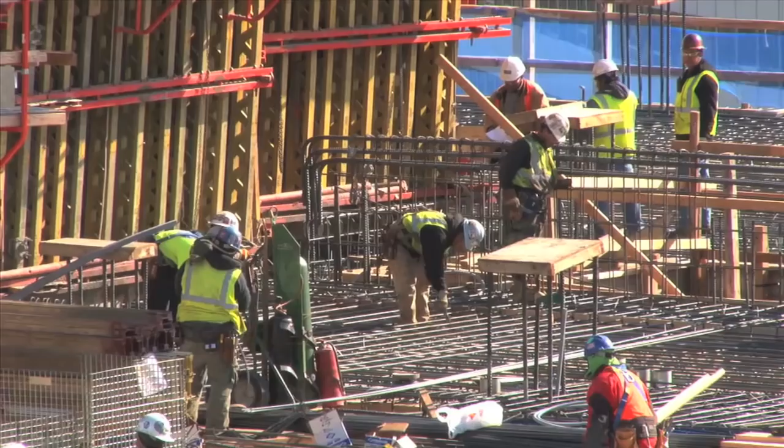There are enormous challenges facing our planet today, and the built environment, as one of the main consumers of energy and resources, offers us a plausible framework to address these issues. Green building gives us a viable way forward in constructing healthy indoor and outdoor spaces, reducing our collective ecological footprint, and in taking our next great leap as a society in the necessary transition to a sustainable built environment.

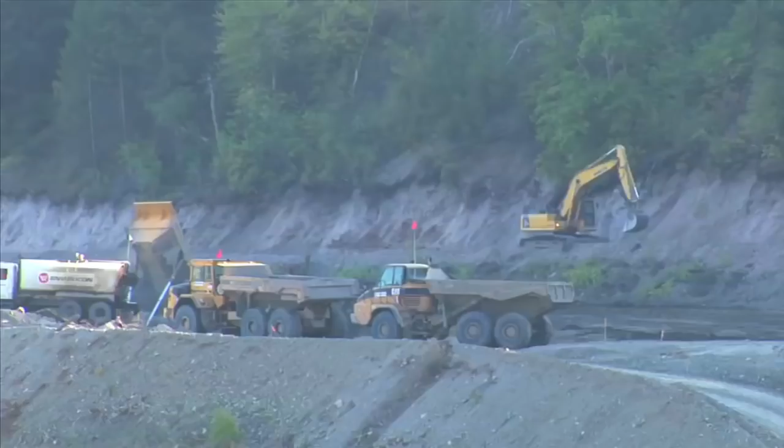Buildings consume significant resources during their design and construction, both in terms of capital and in the raw materials that go into their construction. The clearing of land for development, which in many cases involves forest clear cuts and bulldozers, throws the delicate ecosystem right out of balance.

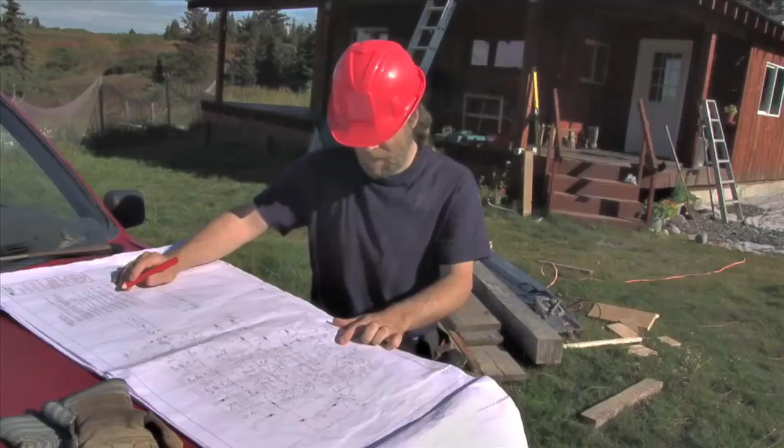This doesn't even mention the extraction, manufacturing, and transportation of these same building materials, which pollutes the air, the land, and the water. Looking at the bottom line, sustainable design and construction, often called green building, is a fundamental necessity in order to help us blunt the worst effects from climate disruption.

Green building reduces environmental damage and pushes project teams to reach ever higher in pursuit of regenerative buildings, which inherently do more good than harm to the natural environment.

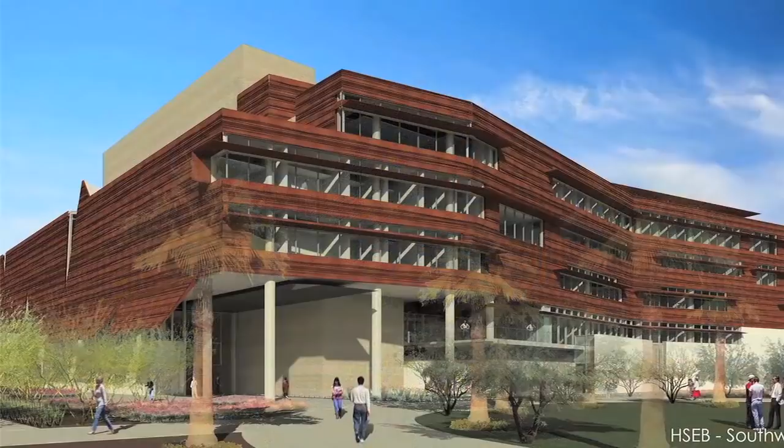The U.S. Green Building Council was formed in 1993 to promote and encourage green building. The mission of USGBC is to transform the way buildings and communities are designed, built, and operated, enabling an environmentally and socially responsible, healthy, and prosperous environment that improves the quality of life.

USGBC develops the LEED Green Building Rating System as a primary tool in service of achieving this mission. LEED stands for Leadership in Energy and Environmental Design and recognizes best-in-class design and construction practices.

This comprehensive free online course will provide you with everything you need to know to pass the LEED Green Associate exam, which demonstrates an understanding of these environmental imperatives and a basic understanding of the LEED Green Building Rating Systems.

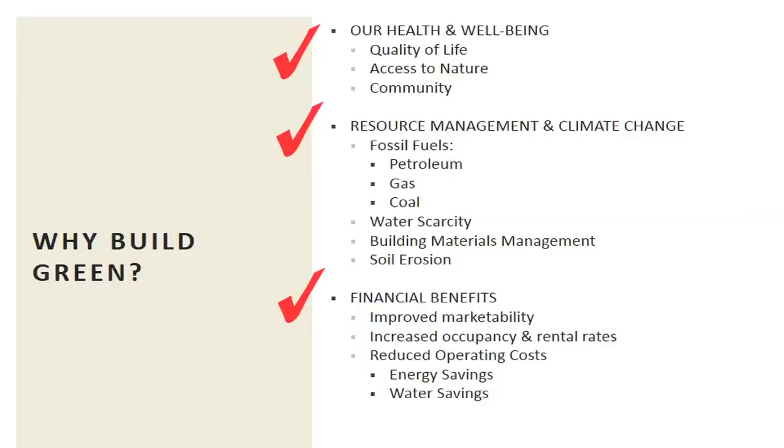Following the idea of the triple bottom line, we consider how each of the 3 aspects relates to the built environment. Our health relates to people. Resource management is the planet or the environment. And finally, the financial benefits, should be readily apparent, relates to the economics and profit, which definitely deserves a place in this triple bottom line.

With LEED fundamentally an instrument of market transformation, it's important for LEED to engage building project teams by tying these program requirements, which are collectively known as credits, prerequisites, and minimum program requirements, more on that in a bit, to specific goals that the LEED program is trying to attain.

What we see here are LEED's system goals, also known as their impact categories. These 7 impact categories were developed and approved by the LEED Steering Committee for use in LEED version 4, and they're as follows: reverse contribution to global climate change, enhance individual human health and well-being, protect and restore water resources, protect, enhance, and restore biodiversity and ecosystem services, promote sustainable and regenerative material resource cycles, enhance social equity, environmental justice, and community quality of life, and finally, build a greener economy.

Now let's talk about the 3 concepts that are at the very heart of this course: USGBC, GBCI, and the LEED Green Building Rating System.

USGBC is the United States Green Building Council. The vision of USGBC is that buildings and communities will regenerate and sustain the health and vitality of all life within a generation. This represents the long-term view of USGBC.

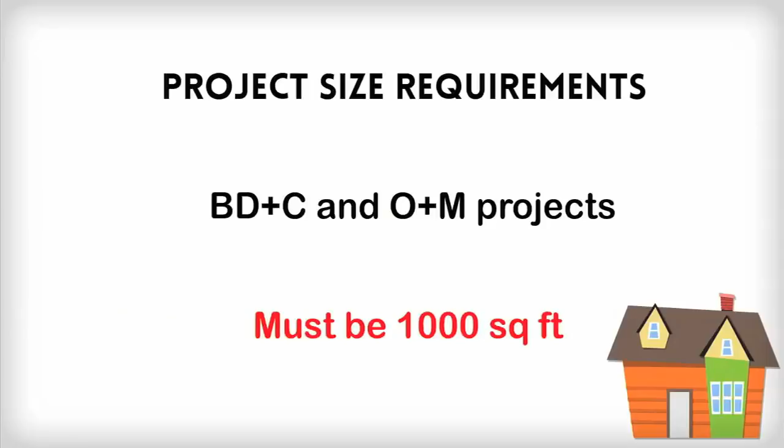Now, the thresholds and calculations that make up the system of evaluation in LEED really start to break down and lose a lot of their meaning once the building or space being evaluated reaches relatively minuscule proportions. So with that in mind, the building design and construction and the operations and maintenance rating systems must be 1,000 square feet. It's not an especially high bar in terms of size.

Interior projects can be as small as 250 square feet, so they can be pretty little, but you can't have a fuel station kiosk or something like that qualify.

Now, LEED for neighborhood development projects need at least 2 habitable buildings, and they have a maximum size of 1,500 acres. And then finally, LEED for homes projects must meet the definition for a dwelling unit, which includes permanent provisions for living, sleeping, eating, cooking, and sanitation.

What this means is that a dorm room with a shared restroom could not be a LEED for homes project. However, the building as a whole could be eligible. To contrast that, your typical apartment that does have all of those provisions that make it a dwelling unit, so sleeping, eating, cooking, sanitation, and living quarters, would qualify for that minimum program requirement.

So let's take a closer look at number 2 here when we talk about LEED boundaries. The LEED boundary needs to include the project area as well as parking if applicable. So while this means there can be more than one acceptable boundary for a project, these are declared by the project team and either accepted or rejected at face value by the LEED reviewer.

So the project team has a degree of discretion. The one commonality that all LEED project boundaries absolutely need to abide by is that they have to be consistent across all credits. And ultimately, the LEED reviewer has to accept the project team's designation of that boundary.

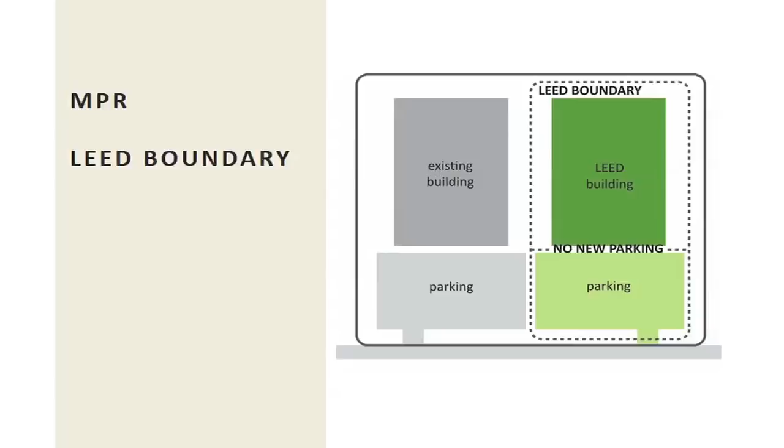Now, some projects, they may be multiple concurrent LEED applications or located on a campus with some shared resources, can comply with LEED using the campus guidance document provided by USGBC. Let's take a look at what that means. The campus approach uses the site area of the entire campus for certain eligible credits. I'll give you an example.

Rainwater management is a credit in the Sustainable Sites category of LEED, and it involves managing the rainwater that falls on the site and, generally speaking, infiltrating it on the site. It's a little more complex than that, as we'll see when we get into that category. But big picture, you need to infiltrate the majority of that rainwater on your site.

Now, there may be a case where it's most appropriate to infiltrate it on a different parcel on the same campus. What this guidance document does is clarify how LEED projects can do that within the scope of the program. So the answer to the rainwater management question is you're absolutely free to infiltrate it anywhere on a contiguous portion of the campus. It could be 100 feet away. For very large campuses, it may be a mile away. But the critical part here is that it's infiltrated on the campus master site itself.

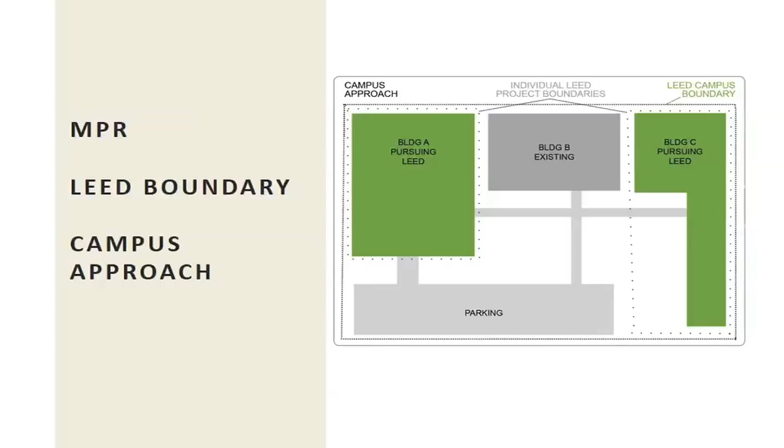Another thing that would be shared would be parking. You'll see here that the LEED project boundaries don't include the parking. However, the LEED application would need to address the parking attributed to the building, shown here in the parking lot, which would be accessible to Building A and/or Building C occupants. So the parking spaces would need to be factored in where appropriate, but the parking lot itself and the construction, say the construction waste of creating the parking lot, those types of things would not be included.

LEED uses a term called FTE that's pretty important. It comes up a lot within the rating system. FTE is short for full-time equivalent. Now let's take a look at what that means.

1 FTE equals 1 individual in a building for 8 hours a day, 5 days a week. Another way to think about it is 1 person in a building for 40 hours every week. It wouldn't have to be the number of days in a week—really, it is hours per week. So what matters here is that 1 individual could equal exactly 1 FTE.

But say a part-time employee who works 6 hours a day in that same building, 5 days a week, would not be an entire FTE. They would be a fraction of an FTE. So if it was 6 hours, then it would be 3/4 of an FTE, based on that 1 individual. It's also possible for a single individual to count as more than 1 FTE.

Why this is important is that we look at FTE in terms of defining how many uses per day certain types of building amenities will be used. In the case of water fixtures, you look at the FTE calculation to determine how many times they'll use those flush and flow fixtures during the course of a basic day. So an FTE who's there, say a part-time employee who's there 4 hours a day, would be expected to use those same facilities only half as frequently as an otherwise similar individual who's in the building for 8 hours a day.

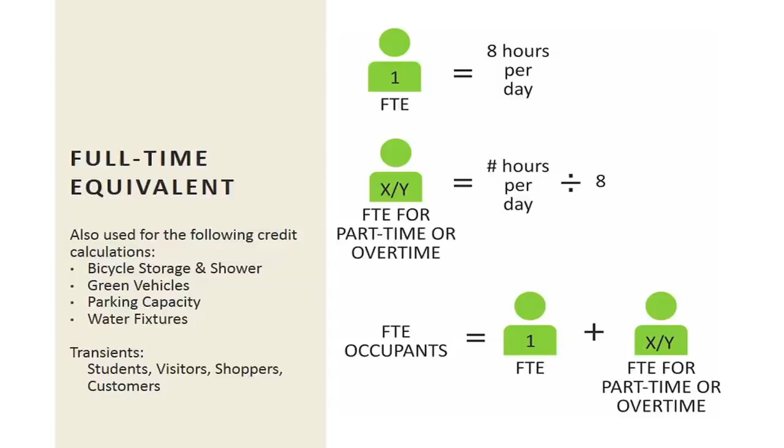Now that we've talked about the minimum program requirements necessary for a project to even be considered for LEED registration, let's take a look at how many of these rating system adaptations, such as LEED for Building Design and Construction, New Construction, or LEED for Operations and Maintenance Existing Buildings, apply to buildings at different points throughout their life cycle. All of these rating system adaptations are listed along a timeline axis based on design, construction, and operations.

While all of the rating systems, with the exception of Operations and Maintenance, cover both the design and construction of the building, the Operations and Maintenance rating system really comes in after the fact and is suitable for either buildings that are in place today or maybe a building that either did or didn't get a new construction certification and is looking to demonstrate operational excellence through a LEED O&M certification.

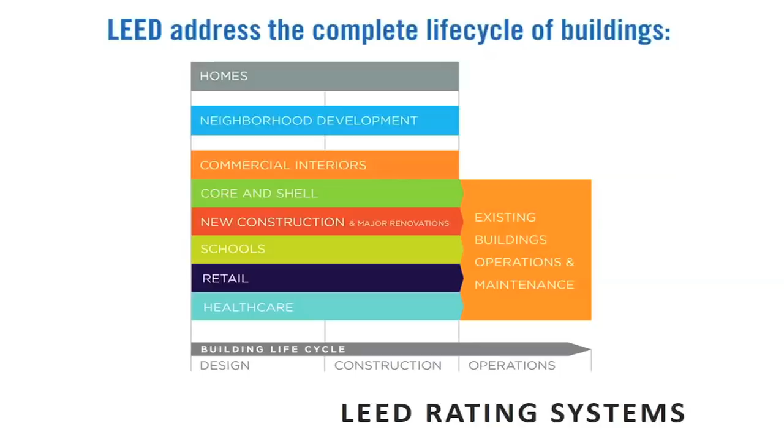It is possible, with that in mind, to have a double LEED certification for a building. So while a new office building's going into a downtown core, it can certify under LEED for New Construction, and then it can additionally get that O&M certification. So it can have a plaque on, for example, each side of the entry doorway.

Let me first clarify a term we've touched on a couple of times. The term rating system refers to that top order category, which includes building design and construction. The term rating system adaptation refers to the specific suite of credits applicable to a project based on its building type, such as a school. Let's look at where each rating system is used and then talk about those adaptations.

The first rating system, and the primary focus of this course, the most well-known LEED rating system, is LEED for Building Design and Construction, or BD&C. Within that one rating system are 8 adaptations: LEED for new construction and major renovation, core and shell development, schools, retail, data centers, warehouses and distribution centers, hospitality, and finally healthcare.

These projects are whole building design and construction or major renovation. A new building, with the exception of LEED for Homes, would always fall within this category.

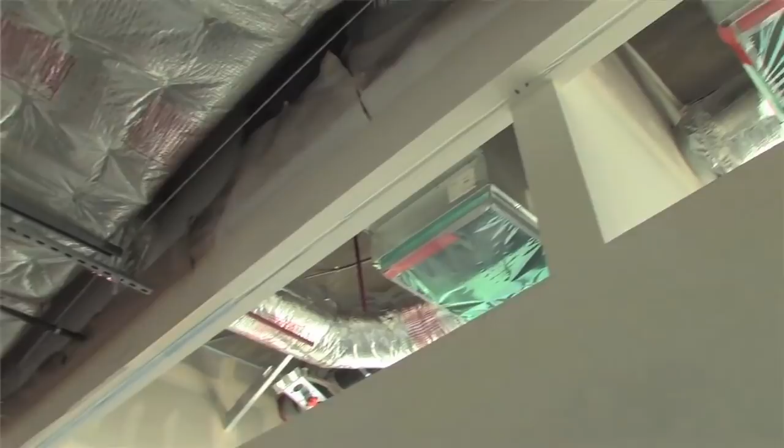Now, the major renovation part is a little bit tricky. There's a fine line between what would be a LEED for Operations and Maintenance project versus a LEED for Building Design and Construction project. The important factor is how significant the renovation is—there needs to be a major HVAC, or heating, ventilation, and air conditioning renovation included within the scope, because there are commissioning requirements fundamental at the prerequisite level within BD&C, and if there's no new or major renovation to the HVAC system, it's not necessarily possible that it could even be commissioned.

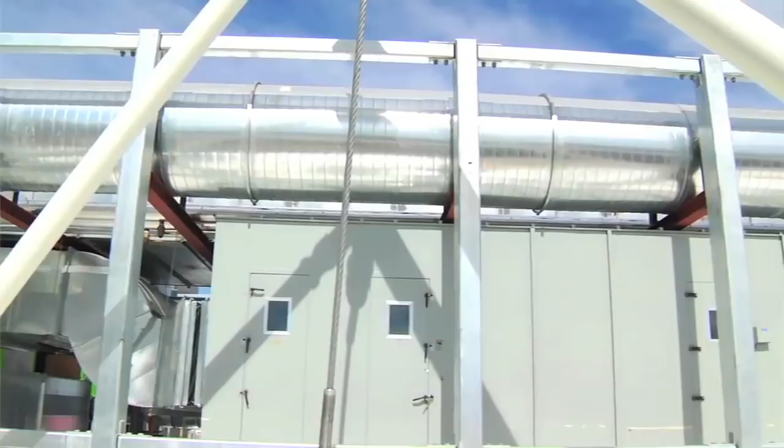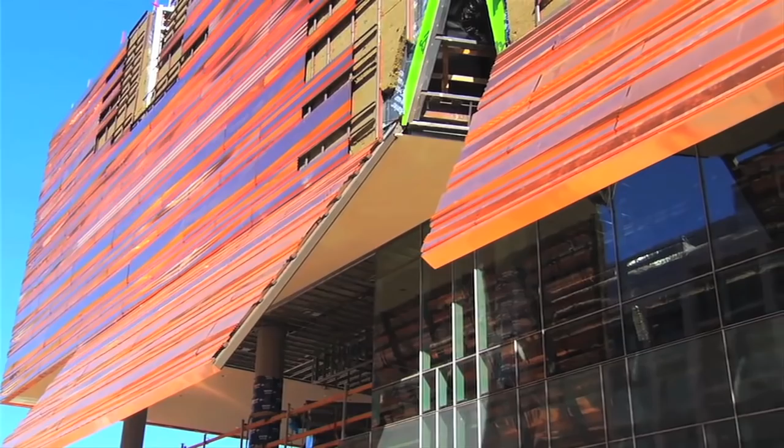In addition, there needs to be significant envelope modifications. That's not an absolute—if you found an existing building that was already sufficiently energy efficient, it could technically be possible, but that would be the outlier. Whereas if you go into a major renovation project, it's quite likely this is an older building where the glazing system and insulation really isn't up to par with the minimum energy efficiency requirements of LEED.

Now I'll mention one quick distinction: the core and shell development project is much different than the rest of these. Core and shell certification does not include the building interior. When we talk about the next rating system, interior design and construction, those are often projects within a larger building exclusive to the interior, whereas core and shell is the complete opposite—creating the core and shell of a building while leaving the interiors incomplete, or at least outside the scope of the project. So that's not for a completed occupiable building, but just for the core and shell.

The next rating system is Interior Design and Construction, or ID&C. There are 3 adaptations: commercial interiors, retail, and hospitality. These are complete interior fit-outs of a tenant space—it may be moving into a new empty core and shell space with or without existing lighting or HVAC, or doing a new interior space, remodeling one that was previously done. Either type of project fits within the scope of ID&C, but it's fundamentally the interior only.

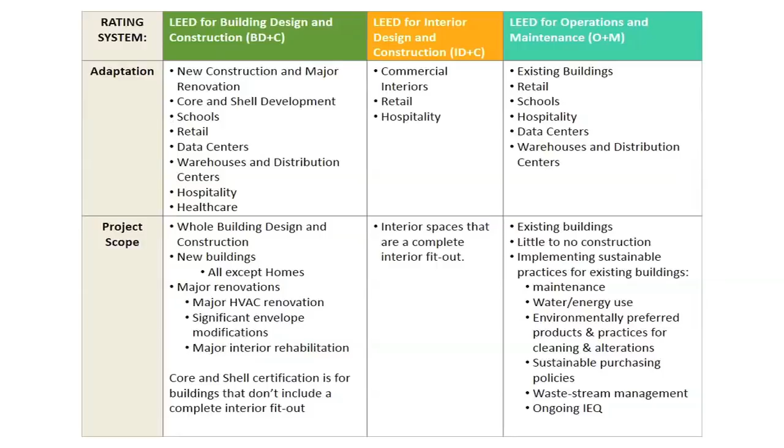The last rating system on this page, with 2 more to cover, is the LEED for Operations and Maintenance program. There are 6 adaptations: existing buildings, retail, schools, hospitality, data centers, and warehouses and distribution centers. These are already completed buildings, and there's typically little to no construction required as part of the O&M certification process. There may be a remodel that happens in parallel, but it's not required to meet the program requirements.

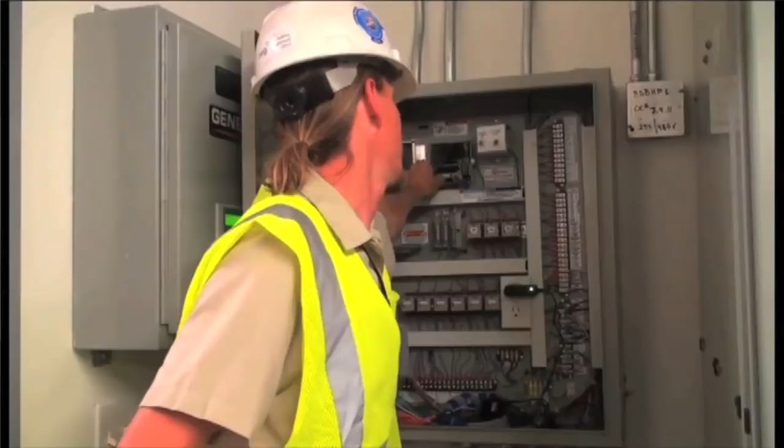The program instead focuses on sustainable operational practices, such as maintenance, water and energy use over time, processes and purchasing policies, waste stream management, and an ongoing commitment to maintaining exceptional indoor environmental quality.

Our last 2 rating systems are LEED for Homes and LEED for Neighborhood Development. Both have 2 adaptations within them. LEED for Homes has the homes and multifamily low-rise adaptation and the multifamily mid-rise adaptation. The project scope here is single-family homes or multifamily residential buildings up to 8 stories.

Those very large residential projects—say a 9-story condo building—would fall under LEED for New Construction instead. Additionally, there must be at least 1 complete dwelling unit within the building, meaning it includes provisions for its own cooking and its own restroom.

Now, there is a distinction between these two adaptations, based on the number of stories in the building. A 1 or 2-story building would always fall into the first adaptation, homes and multifamily low-rise. Anything 6 stories and up to 8 would be multifamily mid-rise. That mid-range, the 3, 4, or 5-story project, could go either direction depending on the Energy Star category it fits into. The Energy Star program is pretty important across many of the LEED rating systems, and they use a parallel set of criteria to place these homes in one adaptation versus the other, depending on how Energy Star sorts them.

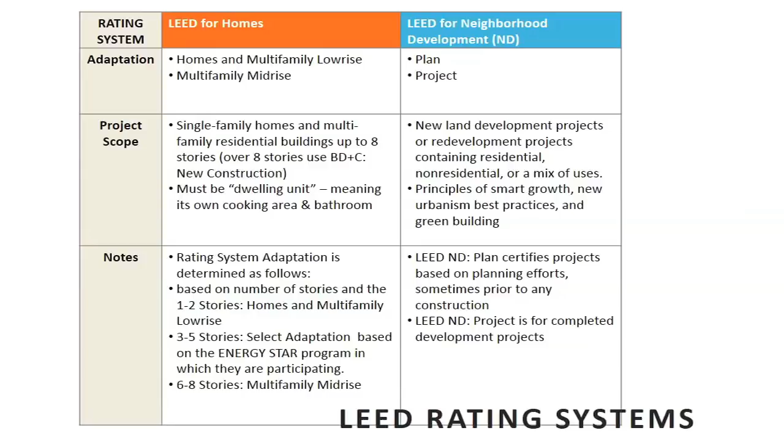We're trying to show a lot of information on this one slide, and it may be a little difficult to read, but let's look again at those rating system adaptations and how they line up under those rating systems, which are parallel to the distinction made for reference guides. USGBC has created resource books for these rating systems called reference guides. Each rating system has its own reference guide, containing all of the adaptations represented here on your screen. We've got 8 under BD&C, all the way down to the 2 versions of LEED for Neighborhood Development.

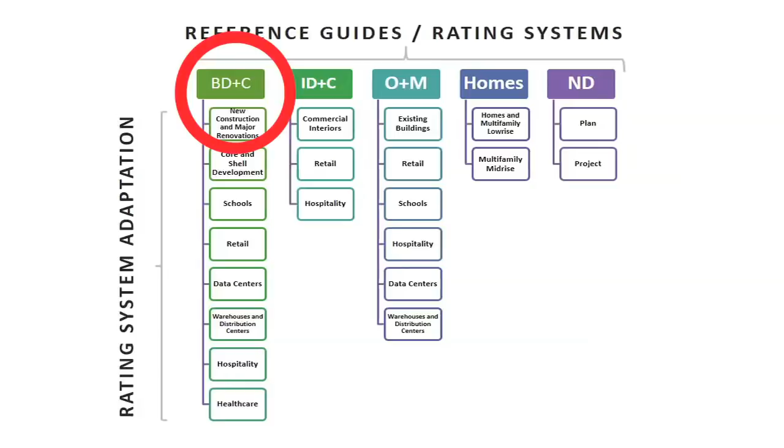Now, the most widely used reference guide is the reference guide for Building Design and Construction, shown on the left here in this graphic. The adaptations found in just that one book are NC, CS, schools, retail, data centers, warehouses and distribution centers, hospitality, healthcare. So it's actually a pretty thick book.

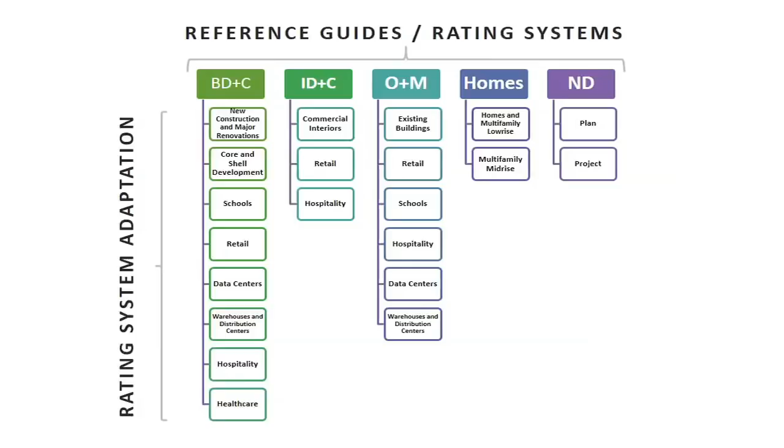The Interior Design and Construction guide has commercial interiors, retail, and hospitality, and on down this list as we've discussed. The final thing I'll point out is that these not only line up in terms of rating systems and reference guides, it's also the same distinction we've got with the same 5 categories when talking about specialty credentials available as a LEED AP. There are 5 specialty credentials available for LEED AP credential holders, the optional next step after completing your LEED Green Associate credential. These 5 categories are universally used across all 3 of those distinctions.

Now we have several sample questions as part of this course, and just to get you oriented, we'll read the question and give about 10 seconds so you can jot down your answer on a notebook. If you feel you need a little more time, feel free to pause the presentation, record your answer, and then hit play to see if you've gotten it right. Our first question: what is the first level of LEED certification called? Again, about 10 seconds, and then we'll look at the answer.

Now our next sample question: an existing building on a campus is going to be renovated. The building will only be repainted and some light fixtures will be replaced. Which LEED rating system adaptation would you use?

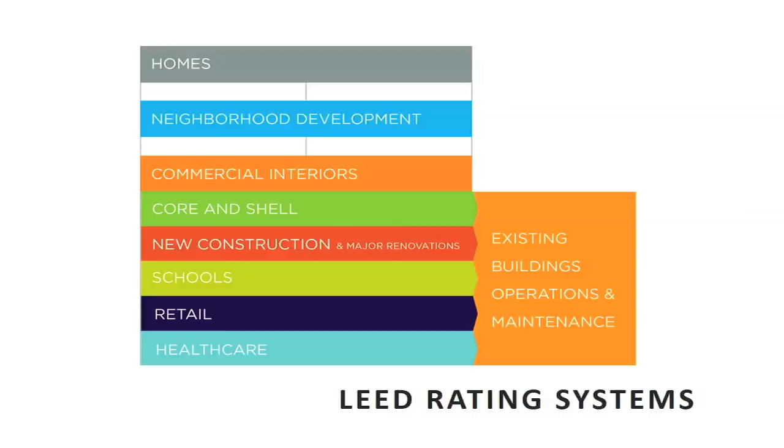So this isn't all of the adaptations, but this shows a smattering here of the adaptations that are available. Now let's look at the components of each.

Within each LEED rating system, there are categories, and within most of these categories are credit prerequisites. These offer no points to your project, but fundamentally every single prerequisite needs to be achieved. If even one prerequisite is not completed by the project team, the building will not be eligible for LEED certification.

So when considering LEED for a project, the next step after determining that your project meets those minimum program requirements, or MPRs, is to make sure that your project can meet all of the prerequisites for the appropriate rating system adaptation. In addition to prerequisites, there's also credits within each category that offer points to your LEED project to determine the certification level.

This includes LEED Silver or LEED Gold, as we've discussed. Credits, however, can be worth a different number of points, because they don't all have equivalent environmental benefit. So while we have 100 base points, those same 100 points are spread across several credits, worth, in some cases, up to 20 points each.

Now, some of these credits offer a way to go above and beyond, and that's known as exemplary performance. Those exemplary performance points are actually tallied in the bonus category that we've talked about, that innovation category. So let's take a closer look at these categories.

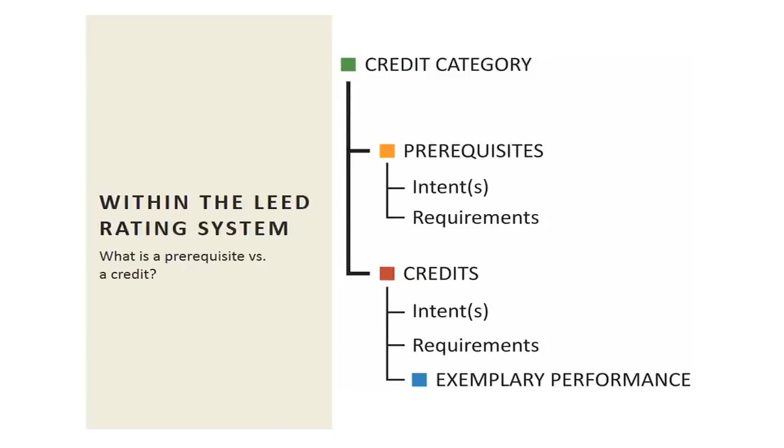But before we do, I want to mention two terms that we're seeing here: intent and requirements. The intent represents the environmental goal that the project's trying to achieve, while the requirements give you the roadmap or technical criteria that the project must meet to earn that credit.

So we see here all of the LEED categories across all of the rating systems. There's no single rating system that has all categories represented, and as you'll see, there's a lot of commonality between certain rating systems. So this just represents the really big picture.

Now, these are 6 categories, 5 entries, but we group sustainable sites and location and transportation as there are a lot of parallels between the two. These 6 categories represent the core categories, and they are used in all of the rating systems with the exception of LEED for Neighborhood Development.

LT is short for Location and Transportation, and deals with site location, transportation, no surprise there, as well as the connection to the broader community. The SS category, for Sustainable Sites, represents site selection, site development, and how the project fits into the fabric of the local ecosystem.

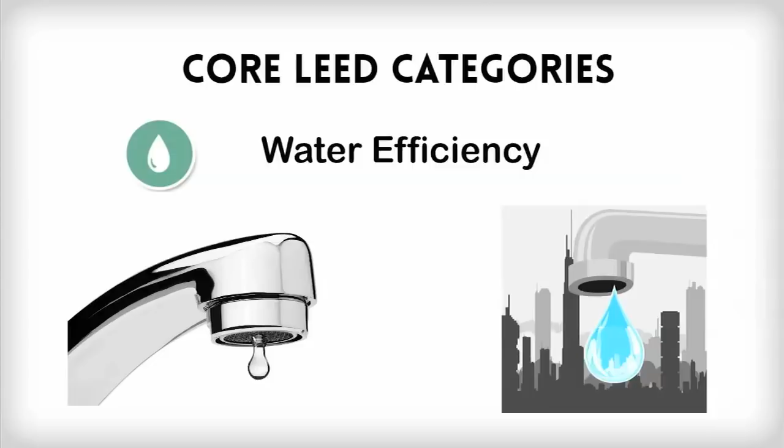The WE category stands for Water Efficiency and addresses both indoor and outdoor water uses, and innovative technologies such as strategies to reduce the amount of potable water you need in your cooling tower. The EA category, or Energy and Atmosphere, looks at using energy efficiently, reducing the grid sourcing of energy needs, and operational optimizations, including minimizing the direct atmospheric damage that can be done by refrigerant.

The MR category, or Materials and Resources, addresses life cycle impacts. This includes recycled, regional, rapidly renewable, etc., end of life, as well as product disclosures that are really starting to get a lot of traction here within the industry. Finally, the EQ category, or Indoor Environmental Quality, represents human health as well as comfort within the building and the connection to outdoors.

Now here we look at all of the categories that are in 4 of the 5 rating systems. All of them except for Neighborhood Development have the same 8 categories included within them. So the 2 new categories, beyond all the base categories, are Regional Priority and Innovation. These 2 categories are the bonus categories that we've talked about.

And then finally we have LEED for Neighborhood Development. So what we've looked at here is how the rating systems are consistent and similar, and honestly how LEED for Neighborhood is very different, as the scope of work for that program is much larger, and for that reason it focuses on other categories that are more broadly focused. The categories addressed in Neighborhood Development do include Regional Priority and Innovation, but that really is the limit of category overlap with these other rating systems.

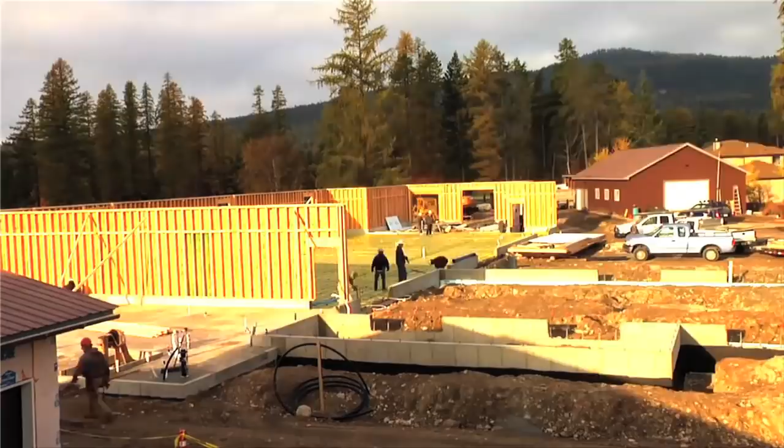Also, how should it feel in terms of the broader community? Should this parcel be dedicated to shops or a park, or should we put some homes here? It also encourages development that is pedestrian-oriented, compact, and diverse.

And finally, green infrastructure and buildings. This encourages both individual green buildings as well as broad strategies such as neighborhood orientation to help set the stage for the future success of these buildings.

And that brings us to our next sample question. Which of the following statements are true of LEED? Take a second to read these questions, jot down your response, pause the presentation if you need to, and we'll take a look at the answer in just a second.

The correct answers here are 1, 3, and 4. That all prerequisites are required based on the rating system adaptation is true. That LEED categories differ depending on the rating system is also true. And that credits within each category offer potential project points, which determine the LEED certification level, is also true.

Now, the one that isn't true here, that registration is awarded when a project completes all LEED prerequisites, that is false. Registration is granted - it's not really an award since there's no assessment of performance that backs up the registration. The registration is granted as soon as the project pays their registration fee and uploads some basic information to LEED Online.

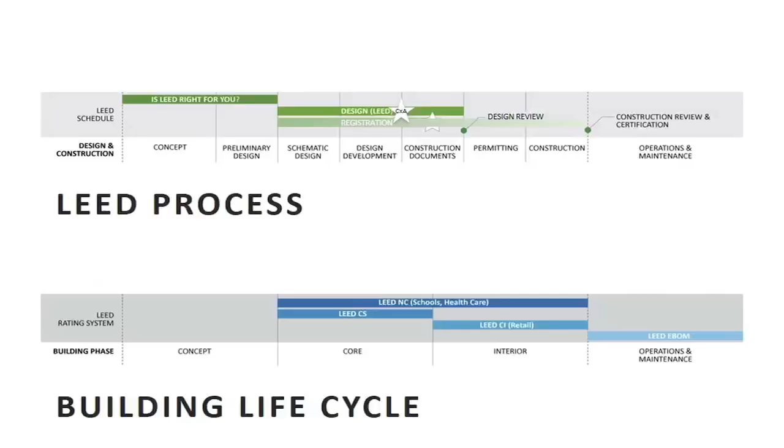Central to successful LEED projects is an integrative process. So what we see here is a bid project. That's one where the contractor and their team is not involved during design, but of course the design team and the client or owner are at the table.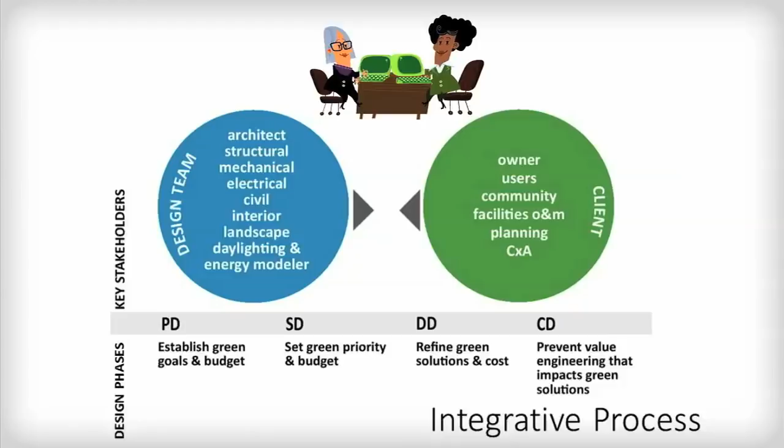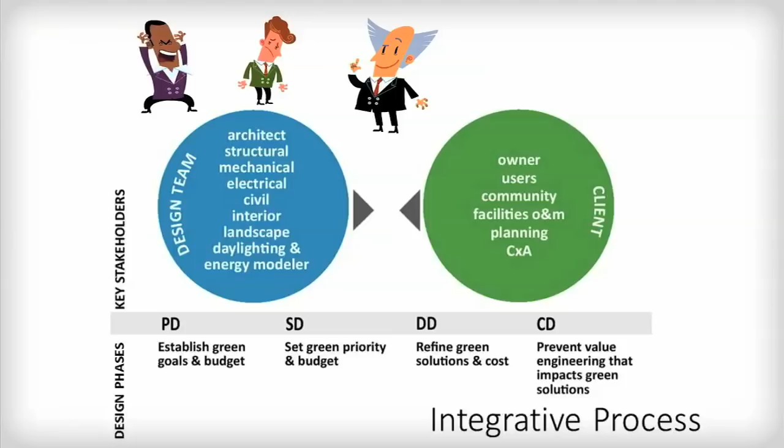Now, the typical planning and design process is one of relying on the expertise of specialists who work in their respective specialties, somewhat isolated from each other in their own respective cylinders of excellence. Now, the architect is typically the one tasked with being the conduit of communication. So it may be that the civil engineer reports to the architect, who filters that information and disseminates it as appropriate to say the landscape architect and the plumbing engineer. Now that would be essentially where you've got one single party really overseeing all of the communication.

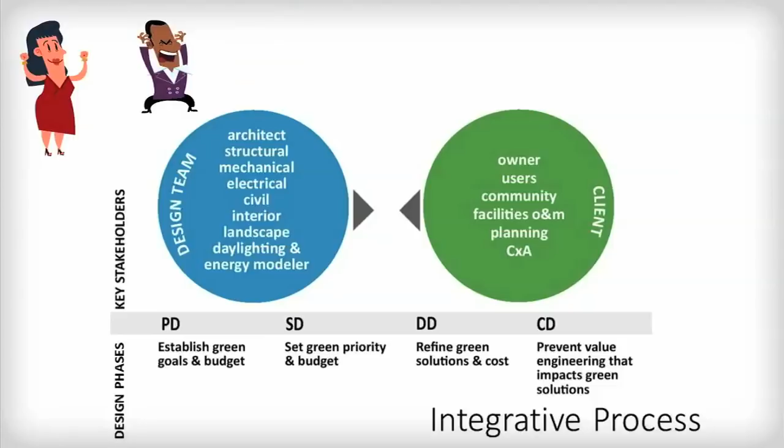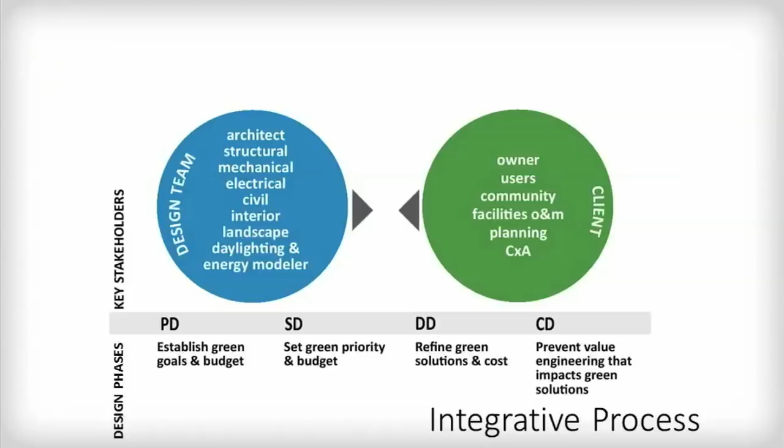Now the integrative approach is one that asks all the members of a project stakeholder community and the technical planning, design, and construction team to look at the project objectives, the building materials, the systems and assemblies, and the like from many different perspectives. What this means on the ground is that several whole team meetings throughout the design phase involving all those stakeholders are convened, and they evaluate the cost, quality of life, future flexibility, efficiency, and the overall environmental impact of these design decisions.

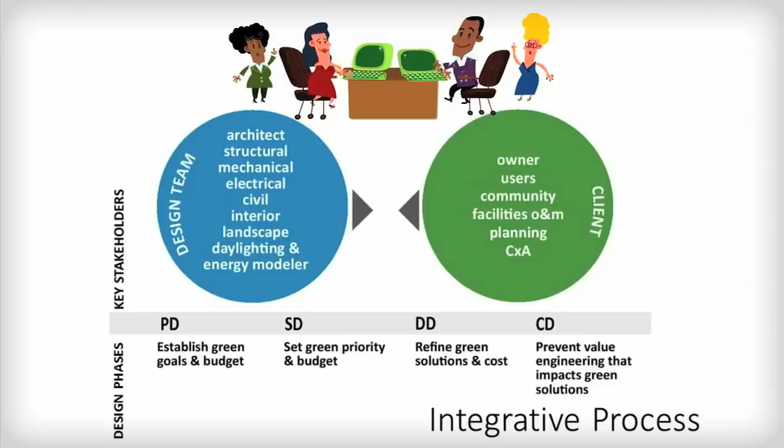This typically begins with a design charrette, sometimes called an eco-charrette if it's focused on ecological or sustainability issues, which is a focused collaborative brainstorming session held at the beginning of a project to encourage the exchange of ideas and information and allow for a truly integrative process to take form.

Now, the integrative approach also works for a design-build project, which is a project where the contractor and their team are part of the conversation from the very beginning. Now, during construction, if the builder and their team members weren't involved during design, they're of course integrated during the construction.

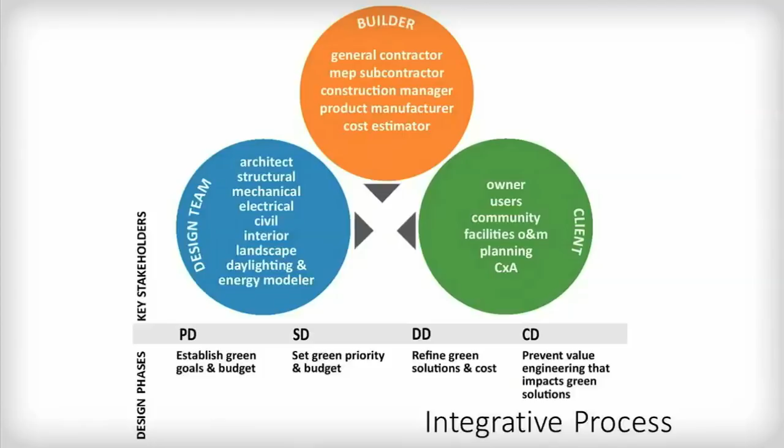Now, critically, the integrative process does not stop once construction begins. That's so important. So once the construction gets underway, the builder assembles their team, and then ideally a full team meeting brings all stakeholders back together to review the LEED project goals. So remember, in this integrative approach, we'd have all team members participate at early stages of design and throughout all of design and construction as soon as they come on board with the project.

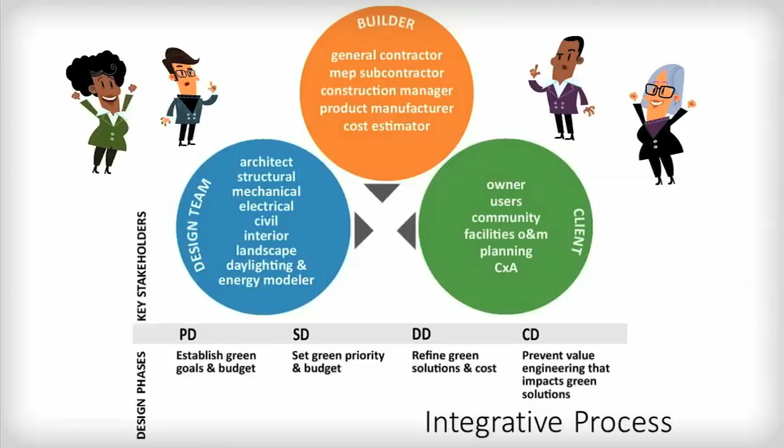Now that you've determined that LEED is right for your project through an initial assessment of the minimum program requirements and the LEED credit prerequisites, and you've determined which rating system and adaptation your project is going to fit into, and now that you have a better understanding of the design and construction process, well then what comes next?

Let's take a brief look at what a typical LEED process would look like. So first of all, we've assessed that LEED is right for the project and the project is ready to move forward. First of all, they would register their project on LEED Online.

Now there's some basic project details that of course can be edited or updated later. Maybe the project name is a placeholder, like Block A project, and later on it'll have a name after a benefactor or the like. So all of those can be changed at a later date.

Additionally, you'll pay a flat rate registration fee with a discount for USGBC members. After that is complete, the project has a registered status and it's free to claim that it is a LEED registered project. Careful though, definitely don't claim it's LEED certified.

Then the project starts completing some supplemental documentation. This includes a project narrative that would describe several aspects of the project, including its use. Photographs or renderings, elevations, some floor plans, and then some details. And then finally, the LEED project boundary, as we've already talked about in the minimum program requirements.

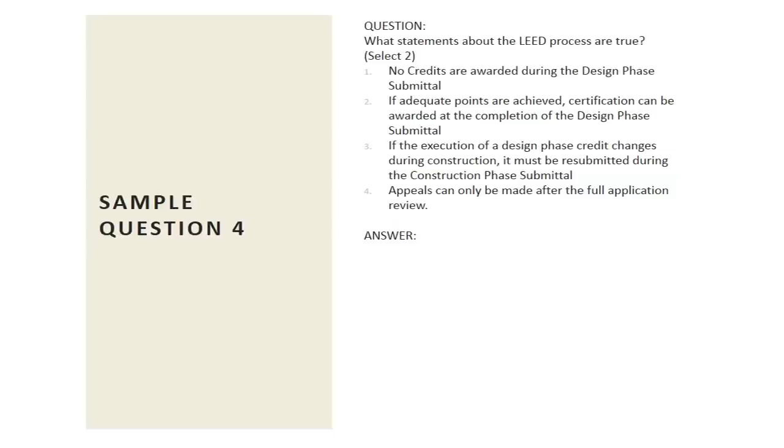Okay, so the correct answers here are 1 and 3: no credits are awarded during the design phase submittal—you'll recall they're marked as anticipated, not achieved—and if the execution of the design phase credit changes during construction, it must be resubmitted during the construction phase submittal. That's exactly why they mark it only as anticipated, because things change in some cases very drastically between completion of design and the end of construction.

Whether it's due to budget issues, redesign, a change in client expectations, or a host of other reasons, things can change, and LEED certainly understands that and offers an avenue for the project team to correct anything that's been changed.

So for the majority of this course, we'll be covering the prerequisites, credits, intents, and requirements found in the Green Building Design and Construction Rating Reference Guide, with an emphasis on the credits used in the LEED for New Construction rating system adaptation.

Let's recap a little bit of this critical vocabulary, and then we'll jump into the categories themselves. The critical vocabulary here is rating system, which would be LEED for Building Design and Construction. We have rating system adaptation, which would include LEED for new construction, and the reference guide, which is the source document that describes these programs. The rating system document is also available, and that one's available at no cost, but the reference guide itself is really where all of the great information is held.

The categories, or credit categories, are represented in each of these rating systems. In each category, there are credits and potentially some prerequisites, and each of those credits and prerequisites have intent and requirements, and in some cases offer exemplary performance for going above and beyond. These are the categories we're going to be looking at in depth throughout the course, so let's begin with the prerequisites and credits in the location and transportation category.